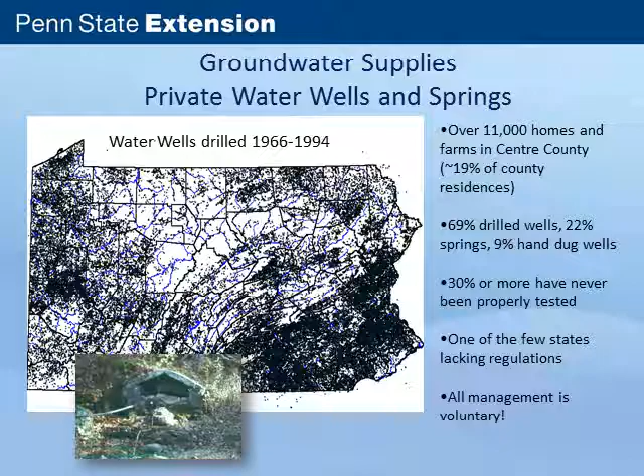And there's a lot of reasons why that's come up for votes many times in the legislature and has always been defeated or never even gotten to a vote in most cases. So everything's really voluntary with these private systems, all the management of them.

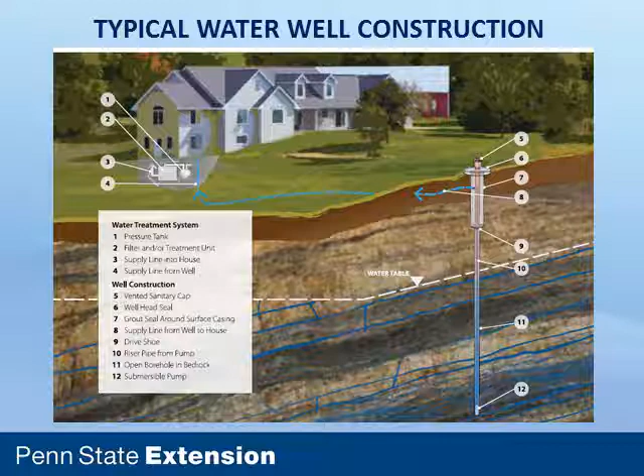We have hopefully a grout seal up here at the top around the casing, which unfortunately a lot of wells don't have in Pennsylvania. We hopefully have a sanitary well cap on top, which again, a lot of wells don't have in Pennsylvania. And then we have a water line running into a pressure tank and then into the home distribution system. So that's a typical water well system that we would have on a residence. Unfortunately, in Pennsylvania, we don't often see that. So this is what we'd like to see if we go out and look at a well.

That's a sanitary well cap with an extended well casing. That happens to be a grouted well also. But we see Maxwell House coffee cans on top of wells. We see cinder blocks and all sorts. I mean, I could show you lots of pictures of really, really ugly water wells here.

This happens to be a water well here in Centre County that was a Penn State professor's well. And it was a case where they had an old pit and they had extended the casing up. They started to actually retrofit the well and they never finished it, basically. They just left it like that. And that well was loaded with E. coli bacteria and coliform bacteria.

This is one that's in a barn. It's an old bucket around the casing. You can see the wiring here is broken. That well was loaded with contamination.

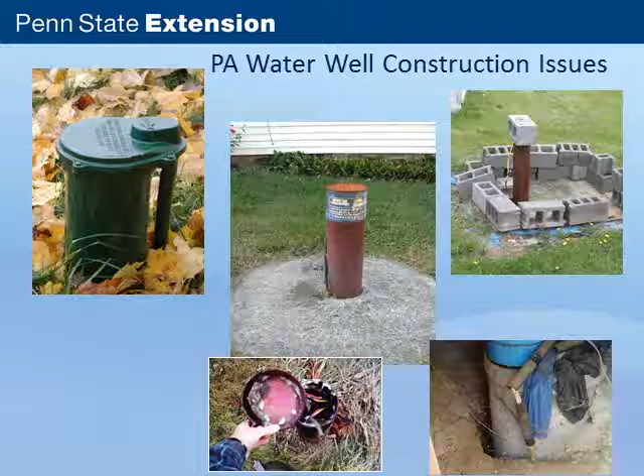Here's a USGS picture that shows insect infestation underneath well caps, and we see that pretty routinely. USGS did a study where they went around and picked up a bunch of these standard well caps that just bolt on loosely to the casing and found that about half of them had insect infestations under them, and that could lead to bacterial contamination as well.

And then we sometimes see things staring back at us when we pick up well caps. That actually happened on my well when I first moved in. We had mice living in the well, and as a result we had a lot of bacterial contamination. They'd actually put a UV light system on the well. They didn't go out and look in the well to see what was going on, so we got rid of the mice and never needed the UV light system after that. So they were purely responsible for all the bacteria that we had in our well.

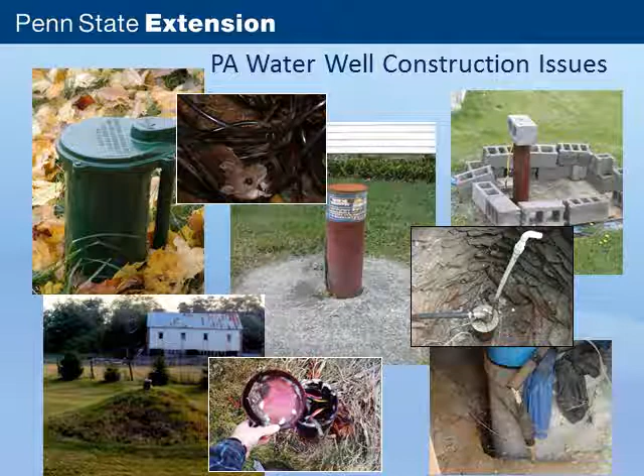Here's one that's an old hand-dug well where they drilled a new well down through the hand-dug well, basically. And that can also cause problems with a lot of contamination of surface water that fills up in that pit and gets down around the casing. And then we have people that are just nervous about their well and build castles around them to try to prevent any of this stuff, especially after we talk to them and they hear about all these stories, they go out and do things like that. So we have lots of stories, things with poor well construction.

We've done surveys of wells around the state and found that 87% have extended casings, which is what we want to see. 13% have completely buried casings. In other words, you can't actually see the well. You have to go dig it up out in the yard somewhere. Only 16% had sanitary well caps. The rest had missing well caps, cinder blocks, Maxwell House coffee cans, standard well caps that are loose fitting.

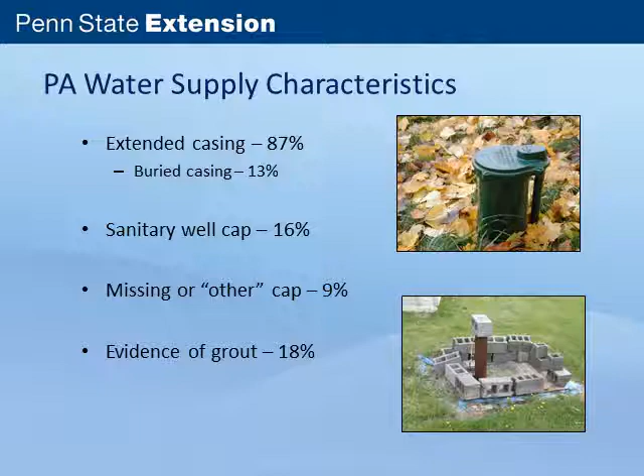And then we have only 18% that had any evidence of a grout seal around the casing of the well. So a lot of existing issues with construction of the water supplies, which can lead to water quality problems, actually. And we know, based on some of the research that we've done, that well construction does make a difference. We did a study where we went out and looked at the well construction, and then we actually measured the water quality.

And specifically, bacteria is one, because it's a surface organism. You would think it's going to be related to well construction. And we saw that wells that had 0 of the 5 things that we look for in a well, and the 5 things being, first of all, a casing, not a hand-dug well, but actually a casing that sticks above the ground, a sanitary well cap, a grout seal, and just a slight slope around that casing to prevent surface water from ponding around it.

If we have all those 5 things, the incidence of E. coli bacteria is down less than 10%. If we have none of those 5 things, basically a hand-dug well, we have E. coli of over 35%. And there's somewhat of a relationship between the two there, where as you add more of these components on, you reduce that bacterial contamination down.

It does not go to 0. It does not mean if you perfectly construct a water well, you will have no problems with bacteria. There are cases where the entire aquifer has bacterial contamination, and you're just not going to get around it, but it still does help quite a bit to reduce the incidence of that down.

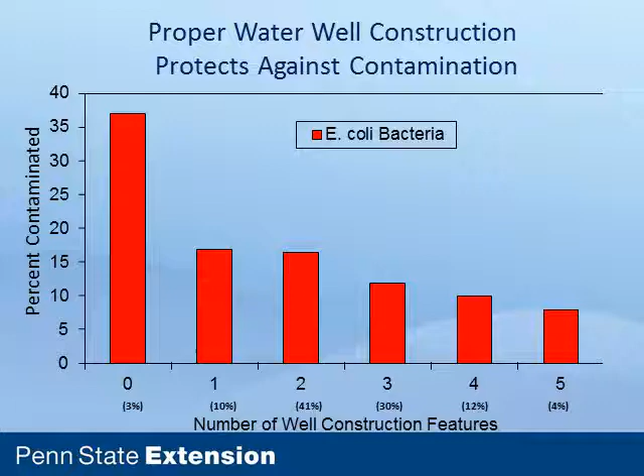If you're not familiar with E. coli bacteria, I'm sure you've all heard of it, but it's a bacteria that only comes from the intestines of warm-blooded animals. So if you have that in your water, it means you have either human or animal waste getting into the water, whether it's a mouse or your septic system or the nearby dairy cows. Some kind of animal is adding waste into that water.

So here in Centre County, what I'll talk about are a couple of things. We have data for almost 500 private wells and springs in the county, and that data comes from a number of sources. We did a study of baseline water quality before Marcellus drilling that had close to 100 water supplies in the county. We also have the Penn State Water Laboratory here on campus that accepts samples in from the public, and we have probably about 250 or so samples that have come in from Centre County there.

And we also had another study that we did just this past fall here in Centre County where we offered some free testing, and most of that was done out in the Penns Valley area. I think the majority of the 80 or so people that got testing done were out in that area because that's where the workshops were held. So it's kind of those 3 sources.

Of those nearly 500 water supplies, they were all tested between 2007 and 2014, and they were 84% drilled wells, 10% springs, and 6% hand-dug wells. Almost half of these folks, when we asked them, said that they had never tested their water before. So 49% never tested. 36% of them said that they were fairly certain there was something wrong with their water, some sort of water quality problem.

And in those cases, when people tell you that, normally it tends to be aesthetic problems. It tends to be things that they can actually see in the water: iron, manganese, rotten egg odor, they smell it; hard water, they see the scale. Unfortunately, those are usually aesthetic problems that they're aware of. They often are not aware of the health-related pollutants because they don't cause any common symptom to the water.

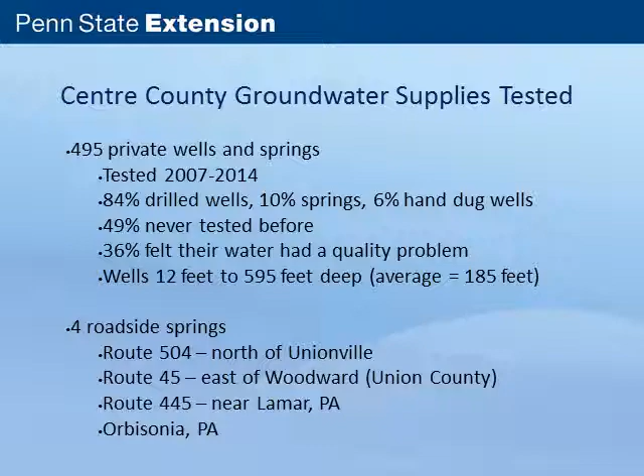It's actually close to my house, but it's a very small spring. It's used by Amish a lot, actually. Most of the time I go by there, if there's somebody there, they tend to be Amish. And then there's another slightly larger spring, and I'm not sure what the route is, but it goes up toward Orbisonia. There's a small spring along the road there that I was unfamiliar with, but PennDOT told me about. And when I went up there, there was a lot of evidence that people had been using that one as well. That was part of a larger roadside spring study that I'll go on here in a moment.

As far as the general water quality that we expect from all these groundwater sources, it's of course going to be tied to the geology. And this is another graphic that came out of that same brochure I was telling you about before. But here in Centre County, we have a diversity of bedrock types. So we have the sandstone and shales up on the plateau, which produce very different water quality than we get in the carbonate valleys down here in the State College area and Penns Valley and the Bald Eagle Valley, which are shown in the dark blue.

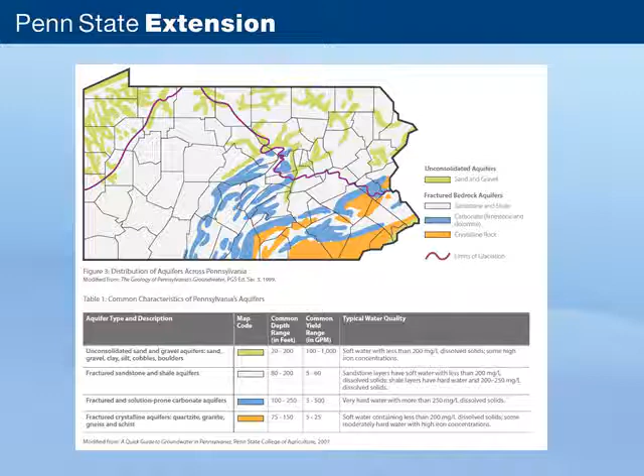And we even have some of the sand and gravel aquifers right down through the Bald Eagle Valley that produce different water quality also. So when we look at the water quality of all these different water supplies, whether they're wells or springs, we have to look also at the bedrock. That tells us an awful lot about why the water quality is that way, whether it's the hardness or the pH or the alkalinity. Some of the common natural problems that we run into, hardness is one of them.

I'm always interested in hardness because it's very much a personal preference, I think. It's really what you're used to. I grew up with hard water my entire life, and so I absolutely hate soft water. It drives me crazy when I go somewhere and there's soft water. But there are people who are the exact opposite and say they hate hard water. They feel like they're showering in gravel when they get out of the shower. And it's hard on their hot water heater and their clothes washer, and all their appliances break down more.

So there are sort of these two schools of thought. Obviously, water treatment people want water to be softened, and a lot of other folks prefer hard water. But it's very much a personal preference. There is no drinking water standard for it, per se. It's really just an aesthetic issue that people either like or they don't like. And it's basically the calcium and magnesium that are in the rock itself that are dissolved into the water. And lots of hard water in this area. Anybody that lives in this area probably knows what hard water is.

We also run into a lot of iron, especially when we get up into the sandstone and shale aquifers up on the plateau. That can be naturally occurring iron, or it can be related to old coal mining, and that forms an orangish red sediment or a metallic taste to the water. It's harmless, but again, it's an aesthetic issue. Same with manganese, but it causes black staining and is fairly common, again, up in the northern parts of the area.

Hydrogen sulfide gas is a harmless gas at normal concentrations, but causes a very strong rotten egg odor. And so again, it's something that people get used to, but if you go into someone's house and they have this in the water, you know it right away. You can smell it, but it is basically harmless. And it is also common in certain shale formations. And then finally, corrosive water, which is one of the more problematic issues that we have, where the water actually attacks the metal plumbing and corrodes the metal.

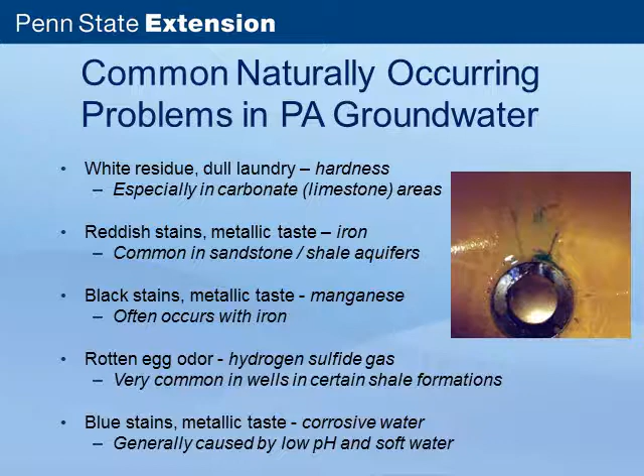I know I've had probably more calls and emails this spring about manure in water than I've ever had. And I think we had some fairly unique characteristics with frozen soils and ice on top of the ground and a lot of manure spreading on top of that. And so I've had a lot of calls about people at least claiming that they had manure problems in their water, and that can be related to manure spreading or fertilizer use on frozen ground and in general all the time.

So if we look at the data here in Centre County and compare it statewide, and we have several surveys statewide that we can compare the numbers to. These are aesthetic issues. We start with corrosion, and corrosivity is less common here in the Centre region than it is statewide. That stands to reason. With the limestone that we have, we tend to have less corrosive water, especially in the valleys compared to the northern part of the county. But statewide, it's a very common problem. It's the most common problem that we see, corrosivity of the water. And we have to then ask people what kind of plumbing they have and maybe do some follow-up testing to look for components of their plumbing.

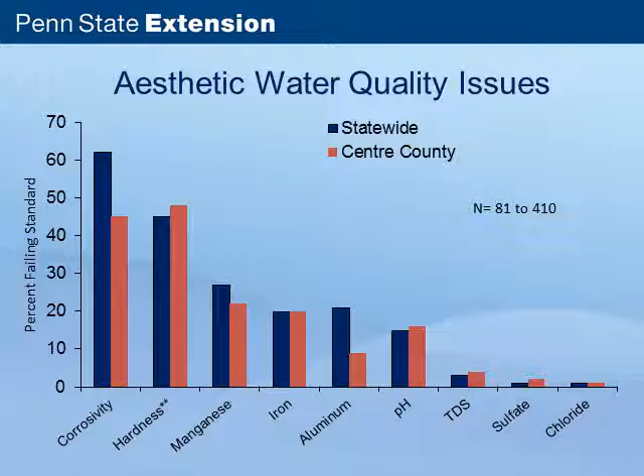And these are each based on sample sizes anywhere from 81 to 410 samples out of those roughly 500 that we looked at. So as you can see, aesthetic problems are not unusual at all. We see them fairly commonly, lots of corrosive water, lots of hard water and metals in the water. These things can all be treated if people choose to. There's not really any problem with that other than the expense of doing it.

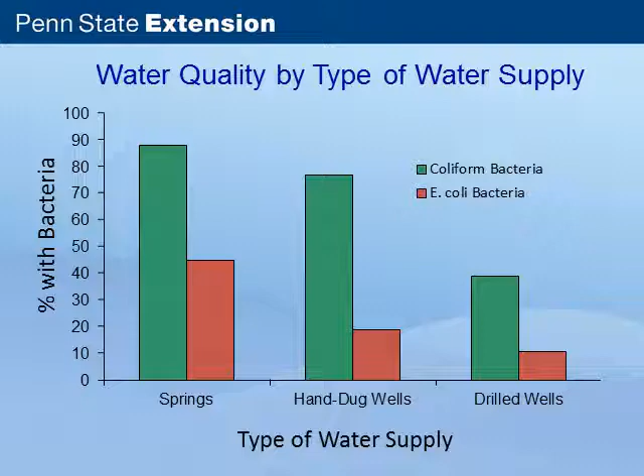And when you get down to drilled wells, you can cut those down significantly. So even drilling wells as opposed to using shallower water supplies may get around a problem with bacteria.

Now, here was another participation question, but how many of you have some sort of water treatment equipment, whether it's a softener or a carbon filter or UV light? It's about almost half of you. And again, I had one myself with a UV light system. When we look at the statistics and we survey people, these other types of water treatment are occasional: carbon filters, oxidizing filters, so on and so forth.

When we did this study back about 7 years ago, the homeowners at least reported an average cost for water treatment of about $1,100 for just purchasing the equipment. That didn't include maintenance, and it also was not adjusted for inflation. So some of these people bought their water treatment equipment in 1970 or 1980. So it's not a true estimate. It's probably low of what the actual cost is.

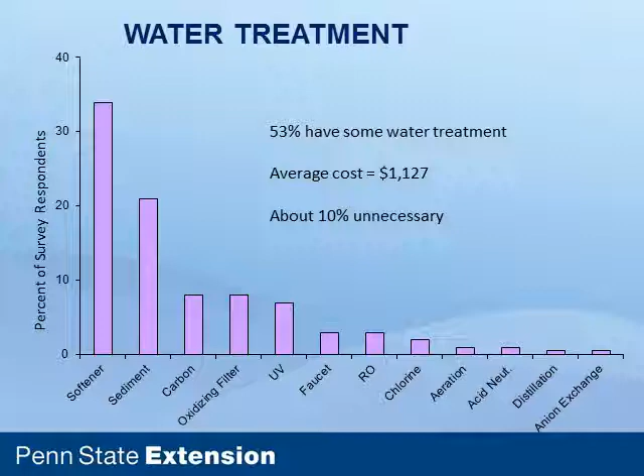And we did find some cases, about 10% of the time, where the water treatment systems in the home did not appear to be necessary. In other words, they had a UV light, but they had no bacteria in their raw water. Or they had an oxidizing filter, but they didn't have iron and manganese or hydrogen sulfide. So there were cases where things were there that didn't appear to be necessary. That could be because the water quality changed, or it could be that they were just sold something that they didn't really need.

So how many of you are willing to admit, at least, that you've consumed water from a roadside spring? Well, good. I have too. Back when I was in college, when we were out doing field work, it was often the only place. That was way before bottled water, so it was about the only place we could find some good tasting water.

One thing that we wanted to do last year, actually, we've always wanted to look more at roadside springs because they've always fascinated me. They get used frequently, although we don't really know how much. We've never really done a study of them to find out how many there are, how many people use them. We kind of assume that the water quality is a problem in them, but there's been very little data ever collected on most of them.

So they're very much an unknown. I know, at least anecdotally, from my perspective of being a water specialist, I read a lot into what I get from emails and phone calls over the years, and I know that the number of calls and emails that I get where people are being referred to me by physicians has gone up pretty dramatically, where we're looking at things like gastrointestinal illnesses, either bacterial problems or protozoans like Giardia and Cryptosporidium. The incidence of that, at least the ones being referred to me, has gone up from physicians.

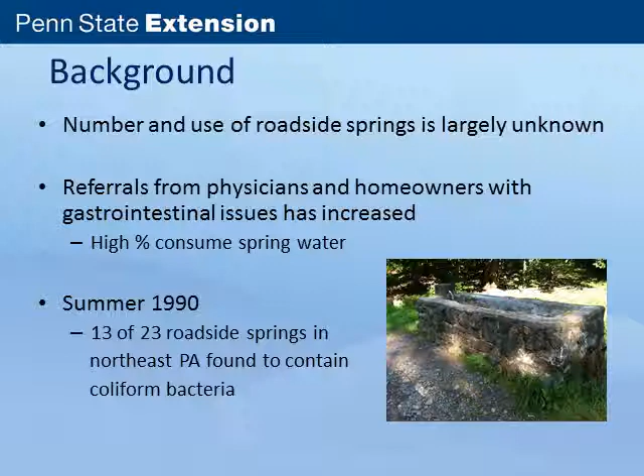And when I start talking to those people, they very, very often have springs, either their own spring or they are drinking water from roadside springs. And those tend to be more problematic when we're looking at surface-related microorganisms like bacteria and protozoans. There was a study done back in 1990. I was not involved in that, but they did look at 23 roadside springs in northeast Pennsylvania and found that 13 out of those 23 had bacterial contamination.

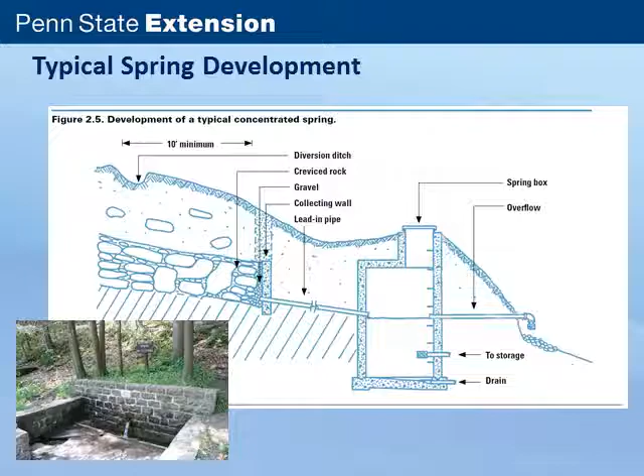Some of them are very beautiful, actually beautiful stonework done around them, very inviting, basically saying, come on in and drink the water. Look at the beautiful stone here, and it's a very, very aesthetically pleasing site. And often they'll have nice signs there telling you more about when it was developed. So they can be very beautiful and very easy for people to get to and collect water.

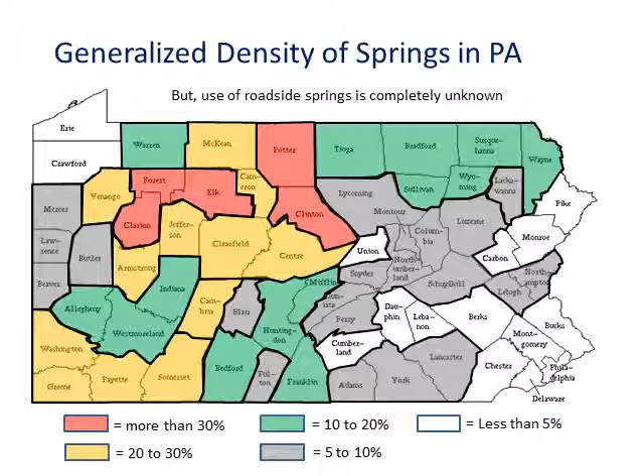And so you can generally see that western Pennsylvania has many more springs than eastern Pennsylvania, and especially this sort of north-central cluster up here, especially Potter, Elk, Forest, Clarion counties, really very high percentages. And so we also wonder if that maybe is where most of the roadside springs are. And just in talking to people, it does seem to be true that we have a much higher density of roadside springs in western Pennsylvania than we see in the eastern part of the state. They're still out there in eastern PA, but not nearly to the level we see around here.

The General Assembly back in 1990, again, put out a report through their Joint Legislative Air and Water Pollution Control and Conservation Committee, where they were actually starting to look at roadside springs to consider regulation on them. So this had come up in the past about what should be done, if anything, about roadside springs to regulate them. And they started to do a little bit of homework on trying to find out about the use and the water quality of them.

Basically, as a result of that report, they basically said, A, we need to create an inventory. We need to find out where these things are, how many of them are out there, how big are they, how much are they used, because we don't know any of that. We don't really know, we only can guess. We need to be periodically testing these, at least for microbiological contaminants like bacteria, coliform, E. coli bacteria, and they suggested that DEP start doing that. They also suggested that some of the really high-use springs that are in public right-of-ways especially, that they consider disinfecting those or providing disinfection treatment of them to make sure that they were safe for people to use, and especially with high-use springs.

And then they said that there should be more public education, and they even named people like Extension, us, that should be out there providing more education about these roadside springs. Not a whole lot of this ever happened, really. I don't know of any inventory that was ever done, and nobody at DEP could ever tell me that there was any done. There was a little bit of testing done shortly after this report and before this report, but nobody knows of any being done any longer on them, at least on any normal scale.

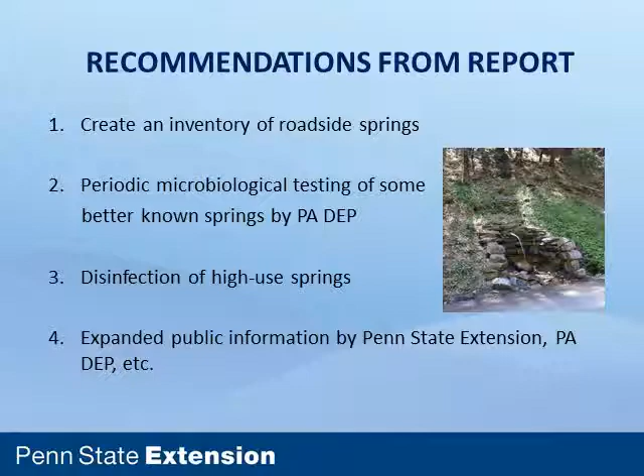There are some examples of disinfection, and I'll show you one of those at least. And there really has been very little in the way of public information about them that's been done. There is one that we know of down in Westmoreland County that's in a state park, Linn Run State Park, where I did a lot of work as a graduate student, and I always was curious about it because uphill from the spring where people pull off, there's a little shed up on the side of the hill. And there's no sign or anything about it.

There's no sign telling you that the water's treated, but actually they're chlorinating the spring in that shed. So people are driving out from Pittsburgh to get away from their chlorinated public water, coming out to the country to the spring and getting their chlorinated roadside spring water. And they probably would be upset if they knew that, but yet it's still a case where they're trying to make sure that the water meets drinking water standards so they're not liable.

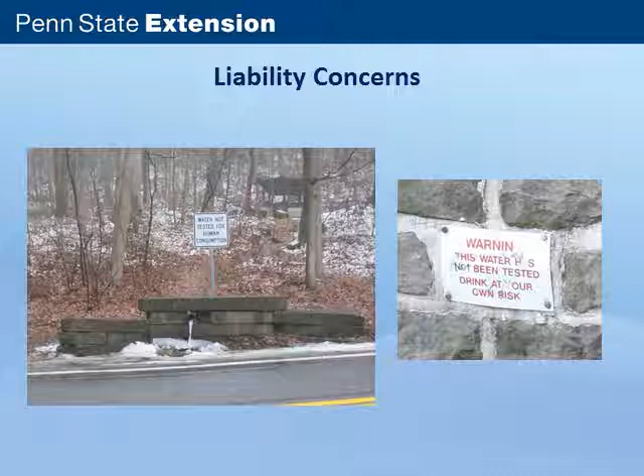Unfortunately, when we tested the water, it still had bacteria in it. So their disinfection system was not functioning properly. And they were going to look into that and try to find out what the problem was. But that's sort of taking it to the full extent where you're actually putting in a treatment system to make sure that the water does meet bacteria standards.

In our case, we looked at springs all around the state, but mostly in those areas where you saw the highest density. So we tested them last summer, spring and summer, April through August. We had 7 different people out in 19 counties collecting 35 roadside springs. We actually added one more, so we did 36. And we basically were looking at sites that were within right-of-ways.

We talked to the owners of these springs, which basically were PennDOT in most cases, or townships, to find out if it was okay to test them and to actually find out what springs they knew about that we should be out there looking for. So this generally does not include some of the real small springs that are maybe privately owned or along private roads. We really didn't get into testing those. These tended to be larger springs.

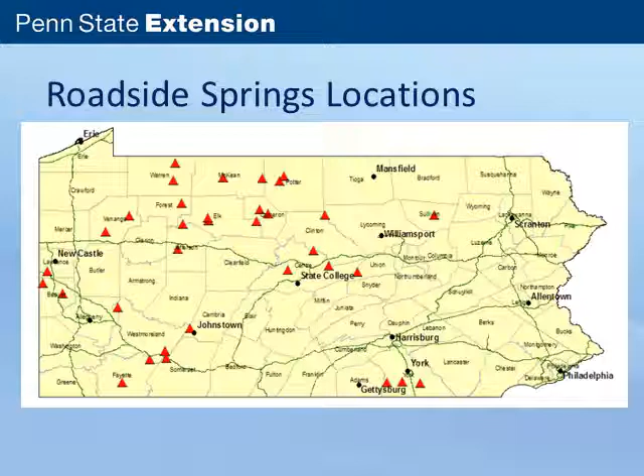And if you go actually investigate some of these roadside springs, I've seen other ones like that too, where they're actually just surface water made to look like a roadside spring. And that plays into the water quality as well. They become even more likely then to have problems with bacteria or protozoans.

Almost that number were corrosive. That's really only an issue if you're storing them in something where they could potentially leach that material. So if you put them in something that has metal, it's going to leach that metal. So that's not a big water quality concern depending on what you're storing the water in, making sure that it's not going to leach. pH was very commonly low. About 40% had low pHs. We didn't have any that had high pH.

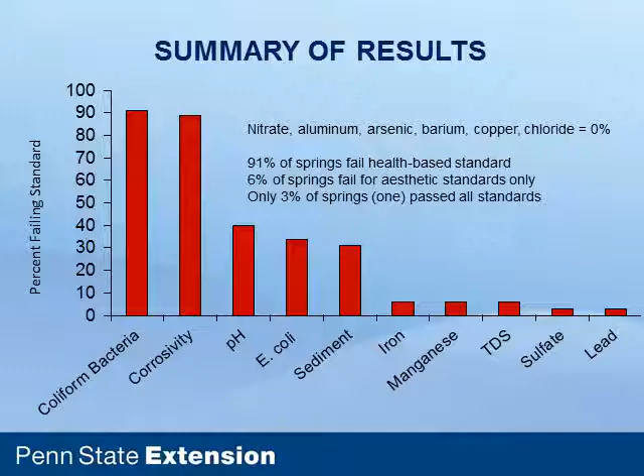What time of the year did you test them? Most of them were in April and May. There were a few that we couldn't get to until later. The last one we did was actually in August, but I think roughly 30 of the 35, somewhere in that vicinity, were done in April and May. And that's important because of seasonal differences in things like bacteria. As the water levels are higher, you tend to get higher incidence of bacteria, and as you get into summer, you might get lower incidence of that. So it does play an important role, I'm sure, in the water quality.

And this is kind of hard to see, but this is for the 4 in Centre County. These are the water quality parameters, and the ones in red would be violations of a drinking water standard. So 3 of the 4 had low pH. The only difference would be the one going up toward Orviston that had not a high pH, but a good pH of 7.6. They all had coliform bacteria. Only one had E. coli, and it's that one that was a stream, basically. It was not a true roadside spring.

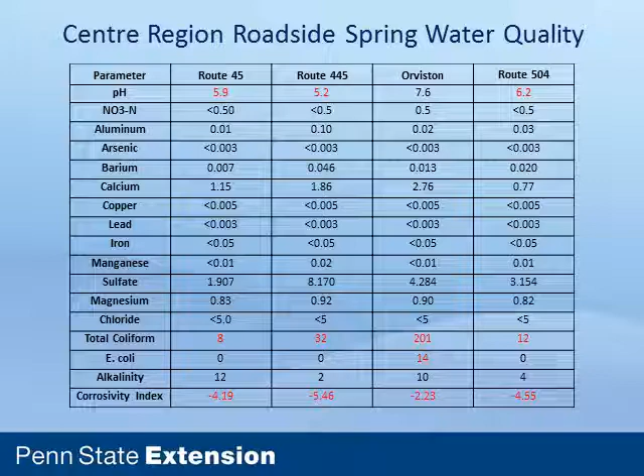The ones that were actually roadside springs, at least when we tested them, did not have E. coli. All of them were corrosive water, not too surprising. But other than that, they were generally pretty good. They had low levels of metals and other aesthetic problems, no nitrate to speak of, no barium, no lead. So from a health perspective, if you could get around the coliform issue and the 1 E. coli issue, they were generally pretty decent water supplies.

That's all I'm going to say about the roadside springs, other than we are going to do more work this summer. We're going back, starting this spring actually. We're going to go back to a number of these springs, and we're going to test them much more frequently for more parameters to try to get an idea of how much they vary. We're going to try to interview people that are collecting water there, and we're going to also start to explore what kind of signage we might use on these, and think about perhaps putting signs out there for townships and PennDOT to use if they want to on these springs.

So it's a potential protection against liability. The last couple things I'll mention, it's kind of interesting to me, and Todd and I have talked about this many times. I have a Gatesburg water well, and Gatesburg is one of the big groundwater formations in this area that provides a lot of the drinking water. And it's starting to get a little bit concerning about groundwater levels in this area, which is always unique.

I think you coined the phrase invisible drought back years ago, maybe before the 2002-03 drought. And it's a very good term to use in this area, because droughts in this area, at least a groundwater drought, tend to be very invisible to people. I bet if you ask a lot of people right now if we're really dry, nobody would say we are, but yet we are.

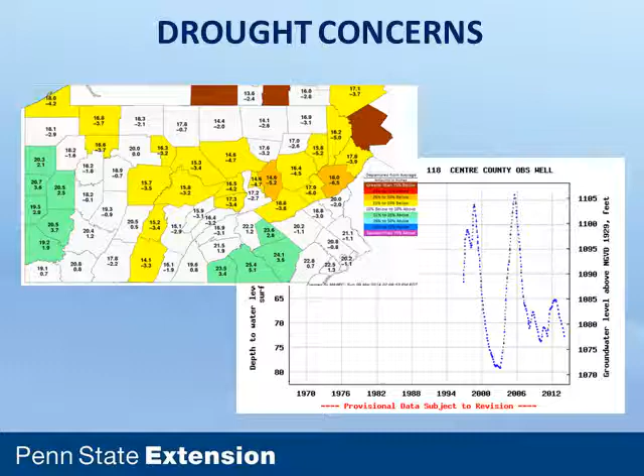The last thing I'll mention, we have a new app that we've developed. Of course, got to stay with all the new technologies out there. And we've been working on an app that will help private water system owners and people that deal with real estate to actually look at private water systems. So it helps identify problems in the water. It accesses all the water quality data at our lab so people can look at what are the most common issues in a certain area. It'll use the location of the phone to put you in touch with the nearest Penn State Extension person who can help answer questions.

So it's called H2O Solutions, and it's going to be available on the Apple version within the next week or so. Actually, it should be ready after Friday. In Apple, you can find it on their store just by searching for H2O Solutions. And we're working on the Android version. It'll be available in the next couple months. So if you know people with private water systems, it might be helpful for them to diagnose what might be wrong with their water and to find help from local folks who can answer their questions.

Paul Knight, the state climatologist, will be there to talk about how Pennsylvania is becoming drought resistant, which I just showed you we're going into a drought, so that doesn't make a lot of sense. But I agree with him. I think that generally speaking, droughts may become less prevalent statewide if we continue down the road of climate change. So if you're interested in that, the registration site's open for May 7th for the Groundwater Symposium.